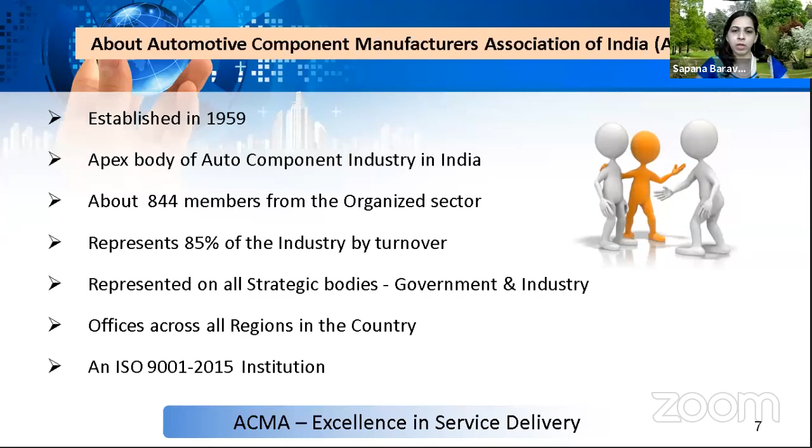So we serve the industry in 5 pillars. We represent the skilling and training pillar. These are the different services we provide for the auto industry and others.

First is we provide the operation excellence program, which we call the cluster program, where we increase your profit and reduce your cost. There are standard roadmaps available, but we have also developed special programs for COVID related things. The first program is break-even point.

Second program is working capital management. Third program is express new product development. Fourth program is productivity improvement through improved factory layouts. And the last program is managing activities within available resources. These are small programs of 5-6 weeks. You can contact us, we'd like to share the details with you.

We also have the ACMA Unido DHI partnership programs for SMEs, so SMEs can take advantage of these programs. We also organize case study competitions. This year, the competition will be planned virtually with different streams.

We also have our own publications. Impact is our quarterly magazine, and we have a book written by our guru, Ms. Nasihan. These are small manufacturing mantras which are helpful on the shop floors.

We also organize the ACMA awards, which are the most recognized in the auto component industry and have a long history of over 50 years. There are 5 categories through which you can apply. There is an ACMA awards online management system, which will be activated from June onwards. So these are the 5 categories you can apply for.

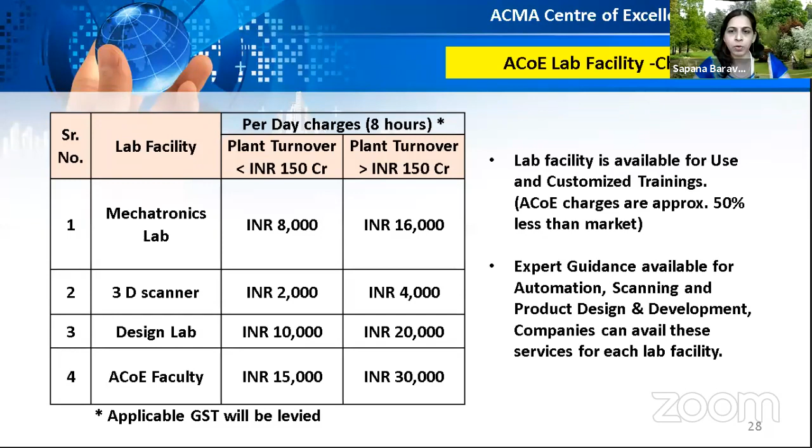We organize national, international, and virtual training programs. Almost 42 successful programs we have conducted till today. These are the technical programs which we organize training for, and also we organize training for soft skills, academia, and general awareness. You can also suggest the topic for training, and we can organize customized programs for you all.

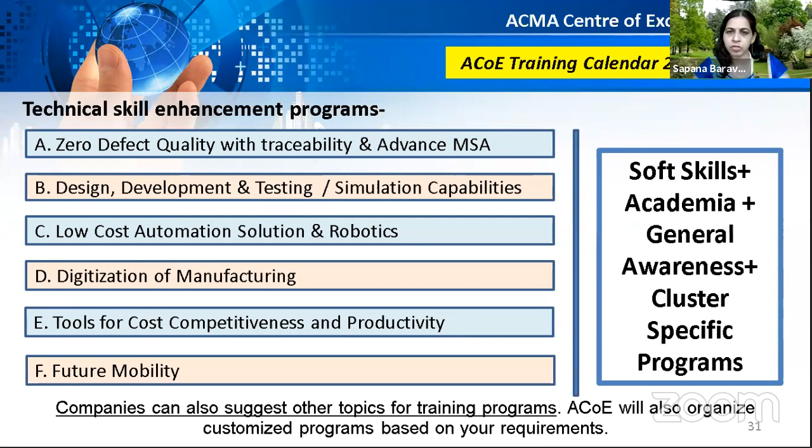These are the upcoming training programs. On 22nd Friday, there is a training program coming on methods for inventory-less production with new methods of shop floor layout. Mr. Dinesh Pathak himself is going to conduct this program.

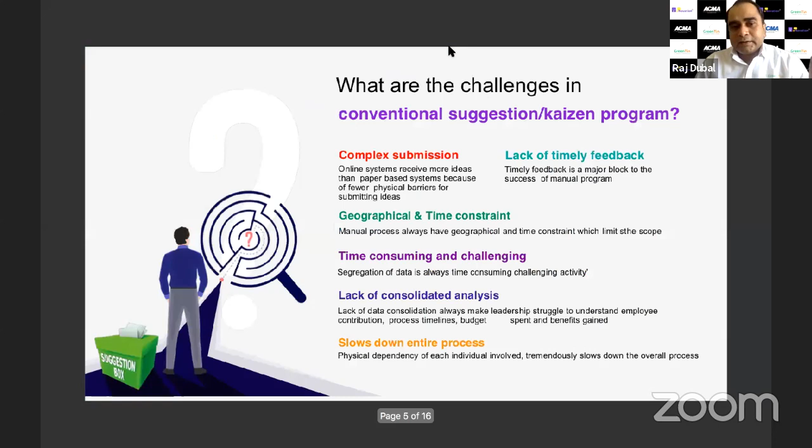What you can have is basically on the cloud. So this My Innovation suggestion scheme, when implemented for your organization, gives you immediate ROI. It's based on cloud technology - you don't have to install anything. It's highly secure like the rest of our services, and it's integrable with SAP or any ERP you have.

Whatever data comes into our cloud system, it feeds into data analytics, and you can access it from anywhere. So these are some of the features of it.

Any suggestion scheme, what the organization needs, is that it should be easily accessible so that all the employees can submit their suggestions from anywhere, wherever they are, through mobile, laptop, or any means.

Once the suggestions or ideas come in, there should be a formal process for processing them, and then feedback goes to the employee. This processing needs a formal way, and once evaluation is done and you implement an idea, then there's a reward and recognition part.

So this entire part we have automated - for example, a knowledge bank. After a couple of years, you'll get a good knowledge bank of all the ideas and suggestions coming into the system. There's also cognitive AI to find duplicate suggestions or ideas, because a lot of people from various geographical regions push suggestions and ideas, so you'll get to know what the duplicate suggestions are.

Just I will start with a brief overview of HPCL. HPC is a Maharatna company. It started in India, with the journey starting with a multinational company, Standard Vacuum, with a refinery in Mumbai, and another multinational, Caltex Oil, in Vizag. Then in '74, Standard Vacuum was nationalized by the government, and in '78, Caltex was also merged, and HPCL was formed.

Last year, in 2019, our company was made a Maharatna company.

In HPC, we deal in different business lines. We have 2 refineries. We deal in petrol, diesel, and many fuels. We deal in lubricants. We are in LPG, aviation fuel, marine fuels - to name the segments, we are there. We are in city gas distribution also. Some new areas we got in the last tender.

Currently, we are having 2 refineries, one in Vizag, one in Mumbai. Another Bathinda refinery we have as a joint venture with the Mittal Group. 55% of our product we are self-sufficient, but the rest, because India is over capacity in refining, we don't require much refining capacity at present, so we take it from other refineries. But for lube, we are the largest refinery in India - 0.45 million metric ton. We are the largest in India, and in that space we are the market leader.

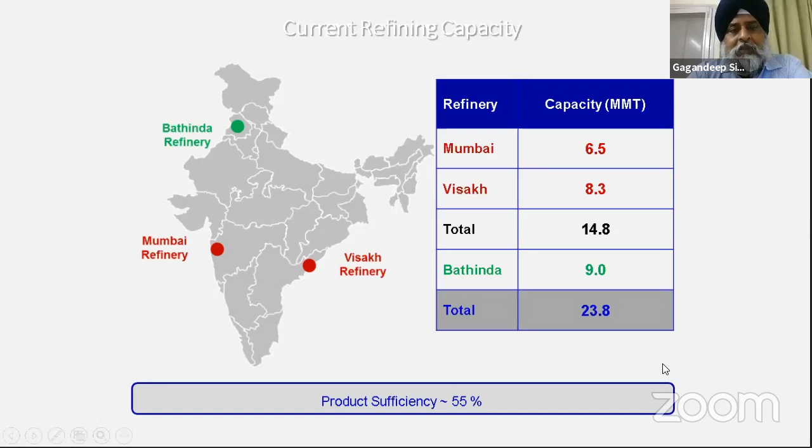As I told, we are the largest lube marketeers in the country. You name the segment, we are the largest supplier to Army. We are one of the largest suppliers to railways, to coal mines, to state transport, to many OEMs, and last but not the least, to many of the esteemed ACMA members also. We are supplying - we have individual supplies also and rate contract supplies.

Among these, the lubricant sector is not a protected sector for anybody. There are 40 players in India. Last year, one independent report has come out showing we are having 17% market share in this space.

Our biggest strengths are our infrastructure. We have 6 different plants at different geographies. Bombay plant is the biggest. Then we have a very modern plant in Silvassa in the UT of Dadra and Nagar Haveli. Then another plant in Chennai, then 2 plants in Calcutta. So we have a good geographical spread for the blending plants also, where we send our base oil, and we can import the base oil also, and blend the product there.

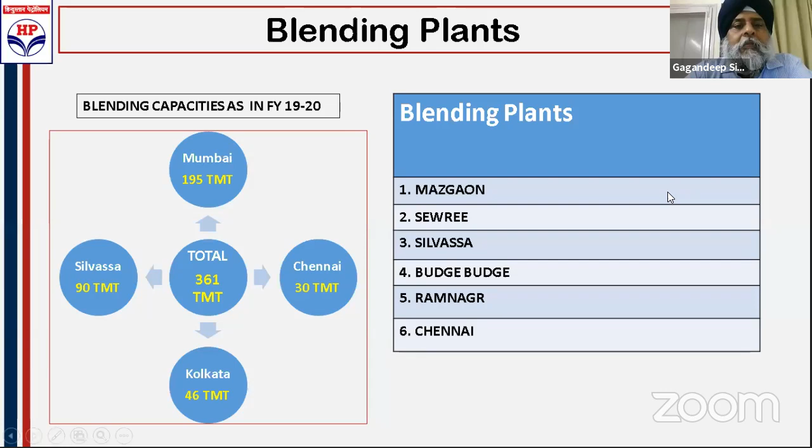I am just giving an overview of our Silvassa plant. It's actually a very modern and fully automated plant with the least human touch on the product. It's a place worth seeing - I will invite ACMA members also to visit the plant whenever they want.

Coming to distribution, we have 11 state warehouses, 20 of our big depots and 4 depots inside customers' premises. Across the whole length and breadth of the country we are spread, and after this lockdown there was a lot of logistics issues for most companies, but because of our spread everywhere and a lot of inventory lying with us, we could service customers to satisfaction.

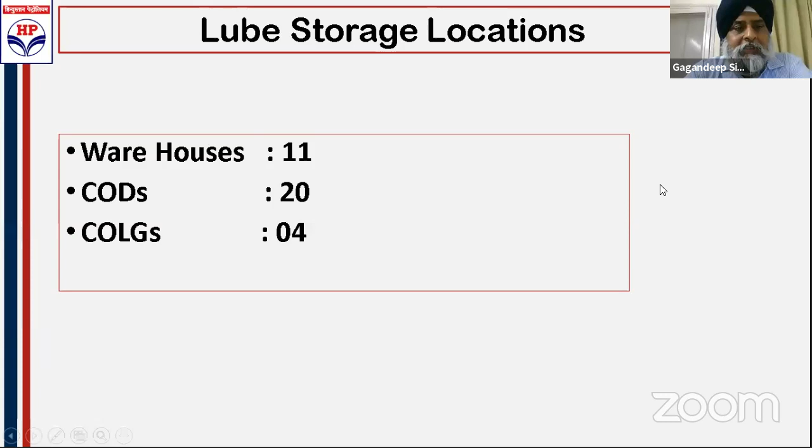Another channel - now the government has given focus to the MSME segment. We already have a very good channel for that, and this is a unique channel in the industry, only in HPCL. Other industry members have different kinds of channels, whereas in our CFA channel, it's not just a selling channel, it is a storage channel also - HPCL storage handled by our channel partner. So we and our customers have very good advantages with this.

We can reach many customers. Say our mega warehouse is in Dharwad, but our customers are at Manesar, Gurgaon, Faridabad, Pune - so we have our CFAs there. Total 113 CFAs at present we have, from Kashmir to South, everywhere.

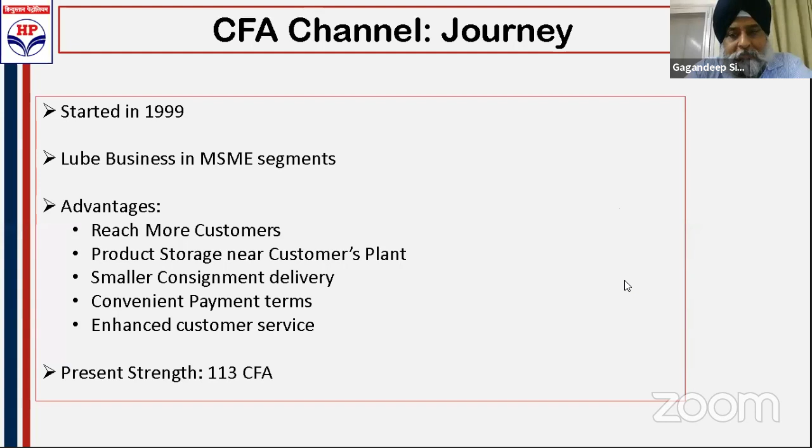Another channel is our lube distributors. In the bazaar segment, where mostly automotive products are sold, we have a very strong network of lube distributors. For the knowledge of the audience, I want to share for the two-wheeler segment - because of this strength, our lube distributor strength, we are the #1 player for the bike segment after-sale lubricant market.

Talking about strengths, our R&D infrastructure is the best in the industry. It is headed by Chief General Manager, Mr. Jain, who is also in the panel. Our R&D infrastructure as well as manpower are the best, and they are tuned to industry needs. We are developing many products based on the requirement of the industry, and we have been quite successful because of this.

Next slide, please. Again, last but not least, there is a quality control setup. Every lube blending plant has a quality control lab independent of the plant. Other than that, we have 46 labs, all accredited, and we can give all kinds of quality services from our system.

Before I get into the presentation, I will just share, in addition to what Gagandeep said, we have 15 Lube regional offices across the country, headed by a regional manager. There is also a sales engineer or technical officer in each regional office, available at the beck and call of the customer to handle quality complaints, to handle any issues, to guide him on any new lubricants, switchover, any new applications, which grade is to be used, wherever the customer is looking for somebody to guide him, especially on lubricants. So this person is very much available.

He's contactable, his numbers, mobiles, all are available. You can go to our website, www.hplubricants.in, and see the product data sheets, get the data, and we are very much within the reach of the customer. So that's one.

Now, as was being talked about, this COVID pandemic has really created a total breakdown for industries, and the atmosphere was that the workshops have closed. So we thought it would be good to share a few very quick tips. Of course, people will have their own maintenance teams who must have already taken care, wherever the industries have opened and wherever they are in the process of opening post lockdown. So these are quick tips I'll just go through. Madam, next slide, please.

In most cases, a simple filtration will work. A simple on-site filtration should work. Next slide, madam. In most cases, a simple on-site filtration will work.

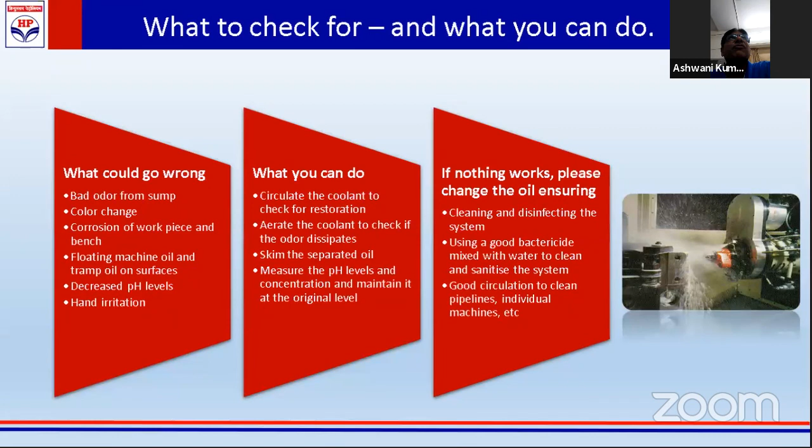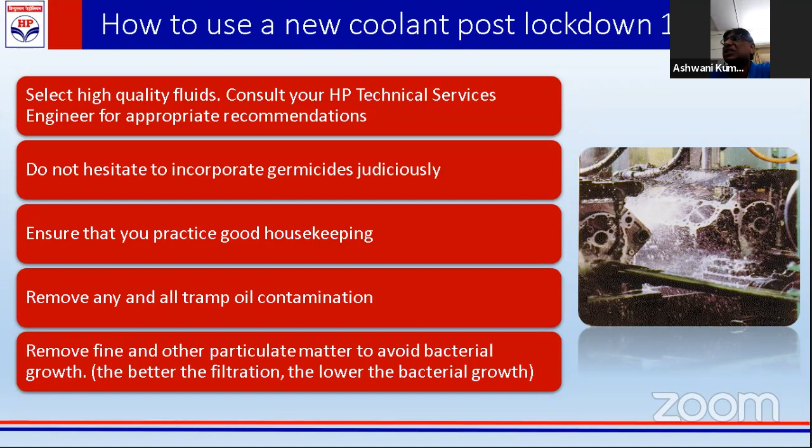Then for soluble cutting fluids, we have the Koolkut series, a number of grades under the Koolkut series, which are soluble cutting oils. I'll be detailing further on that. These may get spoiled, especially if you are not left with regular aeration in the system. If air bubbling is not there in the system, bacterial formation takes place. So the bactericides will spoil, the pH will drop, it will become acidic. The sumps will become acidic and you may have to change the sumps. So you may have to disinfect the whole system and then sterilize before refilling or restarting the machines.

Next slide, madam. Now, what exactly could go wrong? You could have bad odors coming when you approach it. The maintenance team, the operators, when they approach these sumps, they'll find the bad odor is coming, the smell is bad. You may be facing skin irritations when you put your hands in the sump oil, so you need to wear gloves. You may find tramp oil floating, and all that needs to be cleaned. Some rusting might have taken place in the tools, so all that has to be properly taken care of. Circulate the coolant, see that circulation and aeration are established, and measure the pH levels using pH papers that are available.

See that you have pH in the range of 8, 8.5, 9 - so it is in the basic range and no longer acidic. This has to be properly taken care of, so cleaning, disinfecting, and best maintenance practices are called for. Operator safety is also utmost important.

I'll touch more on metalworking fluids and cutting fluids. We have both soluble cutting fluids as well as neat cutting fluids in our basket - a wide range for different kinds of applications, widely used by customers across a pan-India basis, not only for OEMs but even for large auto ancillaries, which may include a large number of ACMA members. And then we have heat transfer fluids.

I'm not touching on this - probably this may not be relevant for auto ancillaries. Then quenching oils, rust preventives, drawing oils, rolling oils, rubber process oils, coning oils. Then transformer oils as well, and even conveyor chain lubricants, and special automotive specialties like shock absorber oils or brake fluids - all of this is an entire range. More than 400 different types of grades are there.

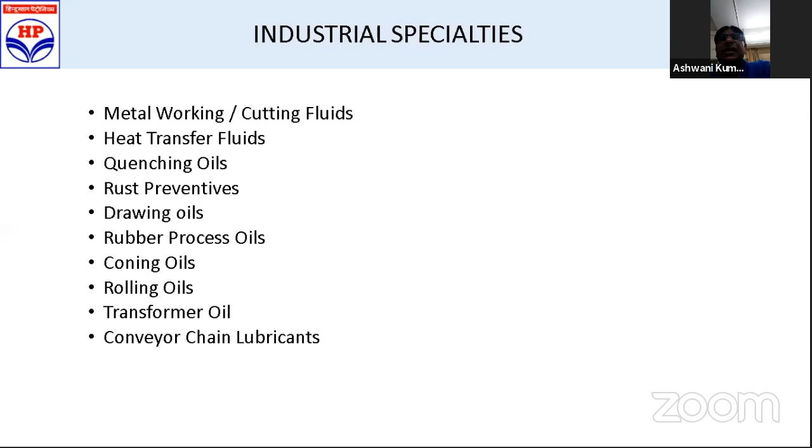So based on the need, we can offer you customized grades. We can study your applications and offer our equivalents to the competitors. Important to add here that we are a public sector, Government of India company. So though we are listed on the stock exchanges and need to be profitable - we are committed and answerable to the shareholders - at the same time our profit margins are wafer thin. So we give value for money to our customers. We are very conscious of our costing, pricing, as well as aftermarket service.

Availability on time - as Gagandeep was saying, there is a wide network across on a pan-India basis, so availability is assured, and we keep drums in advance if you assure us that a certain quantity of drums is going to be used in the next 30 to 45 days.

Coming to base oil categories - people may be aware there are group 1 to group 5, various kinds of base oil categories, with progressive improvements from group 1 onward. These are differentiated basically on the sulfur percentage, the saturates available, and the viscosity index. Viscosity, as you know, is resistance to flow, and viscosity index defines the change in viscosity with respect to every degree rise or fall in temperature.

So the higher the viscosity index, the more the resistance and the more the capacity to withstand changes in temperature. So it will oxidize slowly, and it will maintain more optimum viscosity if the VI is higher.

As we progressively move from group 1 to group 5, we find that group 1 viscosity index is generally about 90, 95, 97 - it's supposed to be between or less than 120. Group 2 is also less than 120, but probably closer to 105, 110, 115 in that range. And group 3 is greater than 120.

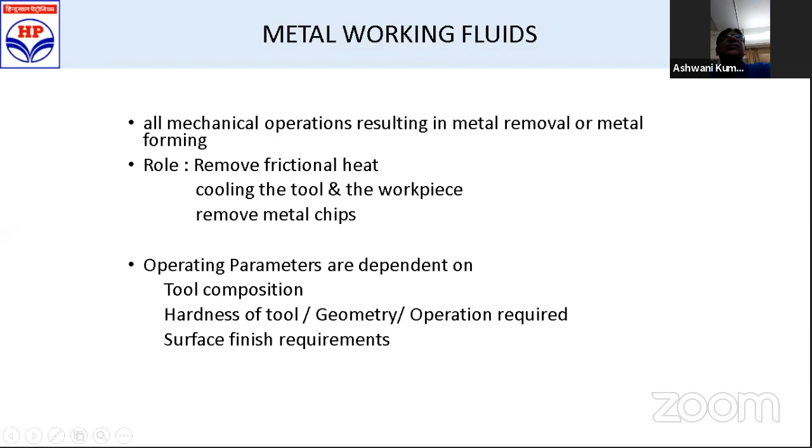So we are talking mainly of oil types of cutting fluids. This can be straight mineral oils or these can be emulsions, blended mineral oils.

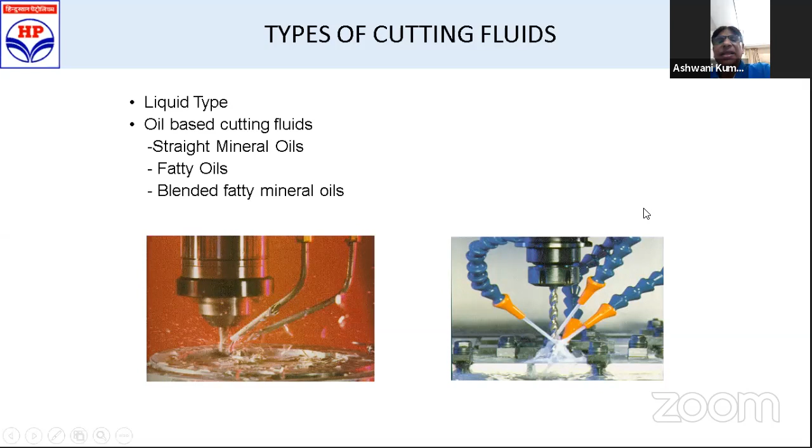In the metal working fluids, you'll find a lot of competition, large number of producers. But if you see the performance, then you'll come to know that our soluble cutting oils don't compromise on the additives. We blend our cutting oils using high performance additives, best of the best in the class, with approximately 20% volume in all the industrial oils, metal working fluids.

Unlike engine oils, where the viscometrics and performance levels are well defined with API and SAE - American Petroleum Institute and Society of Automotive Engineers - here these are customized grades with application in mind, and there are no comprehensive performance tests for comparison. There is no apple-to-apple comparison as such. You can monitor the performance of individualized grades, and the performance will speak for the grade.

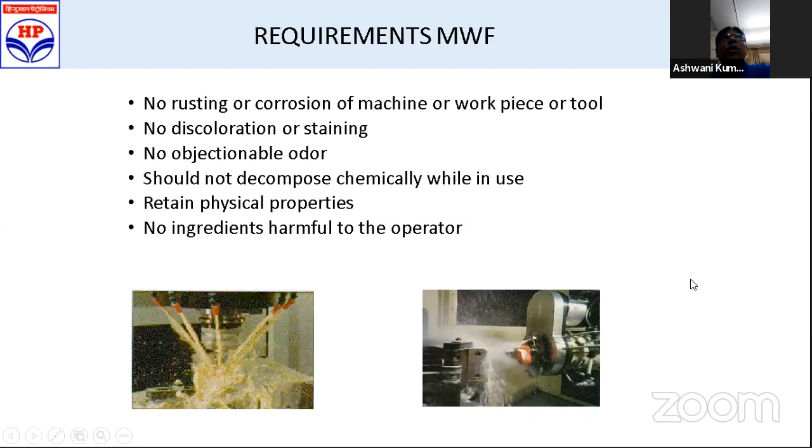Some important precautions for soluble cutting fluids: always the product is added to water, not vice versa, otherwise it will form a paste. Water is about 95%, so generally the product to be added is about 5%. The quality of the emulsion, the stability of the emulsion, depends on the quality of the water - soft water to be used, preferably less than 100-150 ppm max, because if you get into the hard water range, the emulsion won't be stable, you won't get optimum machining, consumption will vary, and the pH will drop. So all those things have to be kept in mind.

Periodically check the strength of the emulsion. There is a refractometer available - maybe people are doing it already. You can take a refractometer and adjust the concentrations, and pH paper is there so that you can optimally keep adding top-ups, which can be decided and adjusted so that the pH is properly maintained.

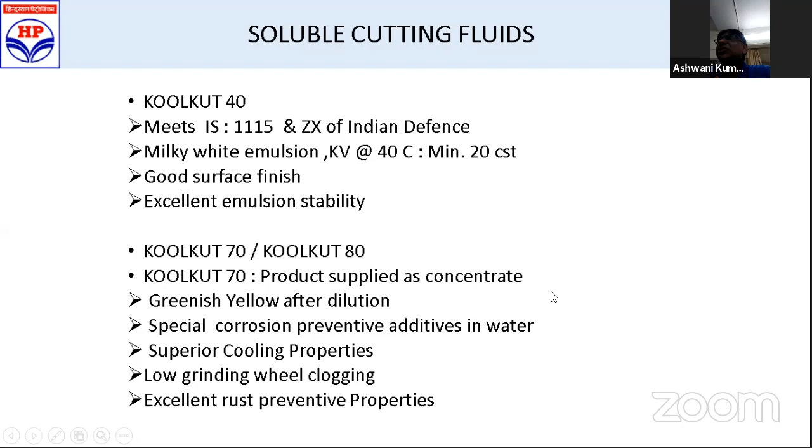We have grades like Koolkut EP66, EP67 with EP additives - extreme pressure additives - for where more severe machining is needed and the depth of cut has to be higher. These are general purpose cutting oils, again 5% emulsions, but for heavy duty applications, and Maruti has been using it in the past. Koolkut EP67 is specially recommended for stainless steel rolling where really severe machining is required. We have in fact replaced Dubois of Netherlands at Jindal long back, and this grade was promoted and accepted by Jindal.

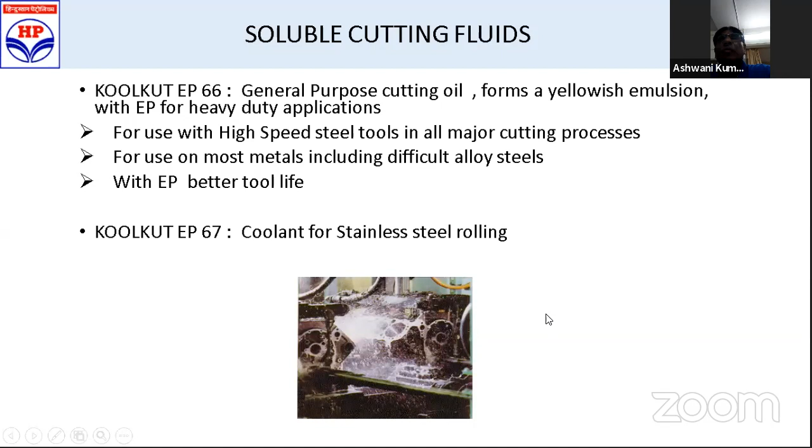Then we have synthetic fluids as well. They are highly resistant to bacterial attack, and lower consumption and longer life are the hallmarks. So then you get into synthetics, but they are costly.

Next slide, madam. Now the challenge is sustainability. What do you see? How is the future? Future is talking of sustainability, that today we are talking of grades which are biodegradable, environmental friendly, phenol free. We used to have cutting oils which had phenol, so today we are having phenol free kind of soluble cutting oils. So sustainable.

Now people define sustainable as when you put a live fish in a cutting oil soluble cutting oil sump, it should not die. So that is a challenge. We should make them that sort of friendly soluble cutting oils so they are not harmful to human life, not harmful to animal life, no skin irritations, no kind of any harmful effects on the human body.

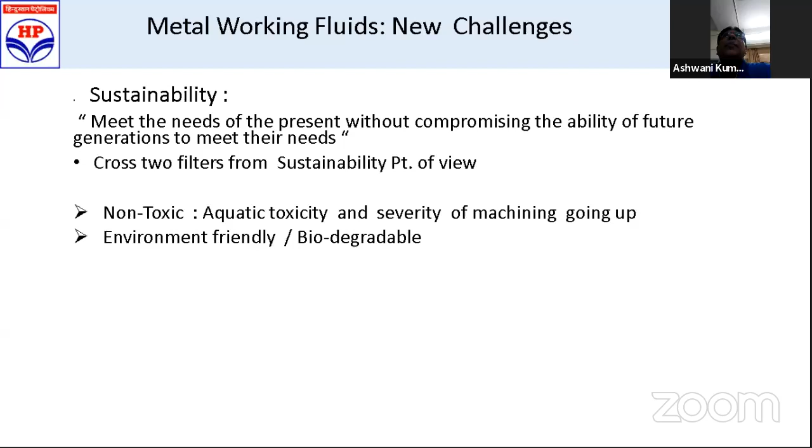Next slide, madam. Then coming to neat cutting oils, we have a wide range of grades, specially customized grades. We have Trimofin 14, 15, those kind of very low viscosity grades, especially for honing and lapping applications, finishing operations. Then we have a little higher viscosity grades for honing and all, where we talk of Trimofin 16 and 18. Trimofin 19 is chlorine free, very competitive, a low viscosity product with EP properties.

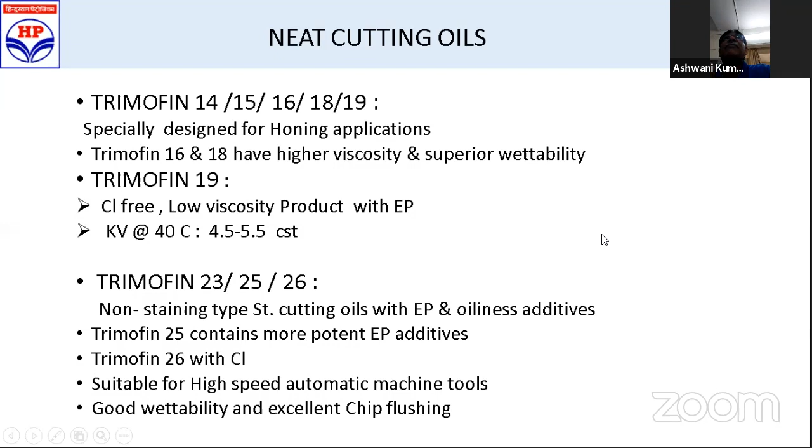Then we have Trimofin 23, 25, 26, which are non-staining, sulfur free. We have active sulfur, inactive sulfur coming into play, so that comes from the base oil and then from the additive as well. So these are non-staining types, straight cutting oils with EP and oiliness additives, and they are very suitable and high performance delivered in high speed automatic machine tools.

Next slide, madam. Excellent chip flushing ability as well. Then Trimofin 27, it's for pull honing. Widely, Maruti Suzuki continues, Maruti Suzuki at Gurgaon is a regular customer for this.

Then we have other grades, Trimofin 54 for deep hole drilling. For deep hole boring, the low viscosity gives excellent cooling and quick swarf and chip removal. Next slide, madam.

Coming to Trimofin 55, 56, these are the staining types. These are for higher machining, for broaching, gear hobbing, gear shaving, these kind of grades with EP, active sulfur, chlorine as well. So these are great customized grades.

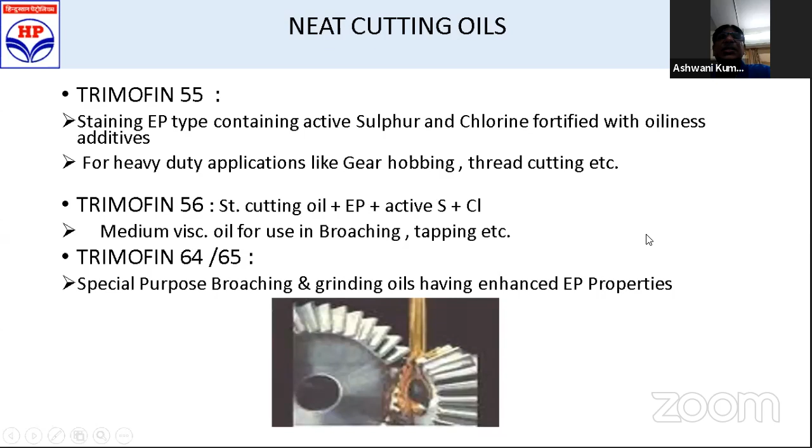Coming to quenching, now what is quenching actually? Quenching is controlled cooling of steel components in a fluid to give specified properties. Now what exactly do we want from quenching? What is the desirable output? It's basically uniform hardening with minimum distortion, minimum cracking, and a smooth surface finish. And again from the oil side, you need the highest sump life, longest sump life, minimum top-ups, longest drain intervals. So that is what is desirable.

Now for that, I'll give three to four immediate quick points which need to be kept in mind. First is the best housekeeping, regular filtration of the quench tank. The quench tanks must be periodically cleaned and the quench oil must be filtered to remove scales, contaminants, and metal shavings present over a period of quenching. Then agitation is extremely important so that the temperature in a vertical tank of the quenching oil from top to bottom is uniform.

It doesn't leave any thermal gradients. The oil is uniform, the quenching is uniform, the hardness received across the metal piece, the job piece, is uniform. So generally we recommend a 50 micron double bag filter for proper maintenance. The oil must be continuously agitated so there is uniform surface microstructure. It's very important, the microstructure, so grain structures are not different. So you don't find any different hardness across the piece, across the job. So this is very important.

So periodically, product sweetening is also essential, apart from agitation and filtration. Then we must also look for that hardening, so basically when you're looking for, madam, next slide.

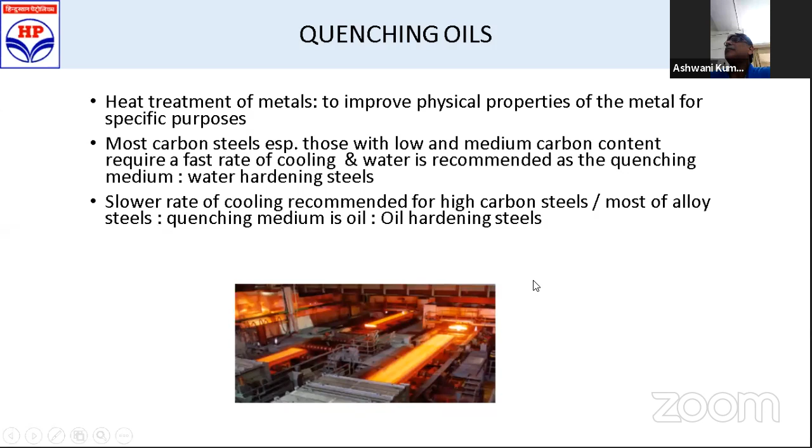Now, flash point - generally people consider this a very important criteria. The most important parameter, as you all know, is viscosity. Especially in case of quenching oils, flash point is also very important to ensure there is no fire hazard. Flash point is basically the temperature at which the vapor is first ignited - the moment you bring it near a flame or spark, the first flame takes place, which is of course not sustainable. The moment it becomes sustainable, we reach the fire point.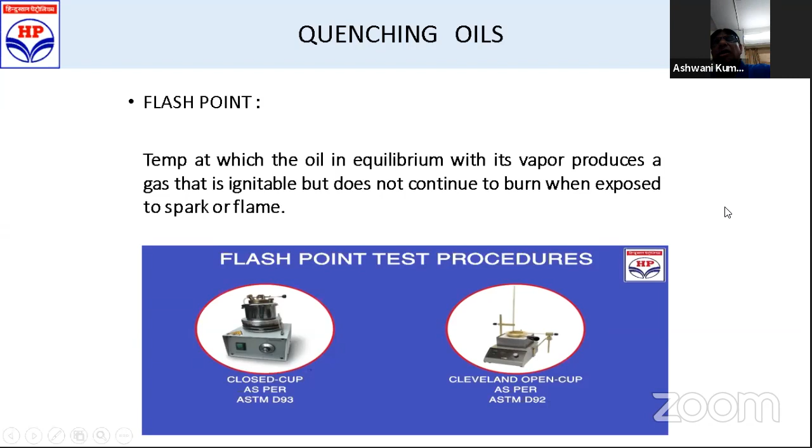Next slide, madam. So now, how do we control the hardness? First is the composition of the steel - what sort of steel are we handling, its properties. Then the dimensions of the component, the structure of the component, the time we are giving, and what sort of quenching we want - a slow cooling or faster rate of cooling. So all of this will vary.

It is important that heat transfer rates will vary with the changes in viscosity. Viscosities decrease as you heat, and heat transfer rates increase as the viscosities reduce - they become lighter and the flow rates are better. Next slide, madam.

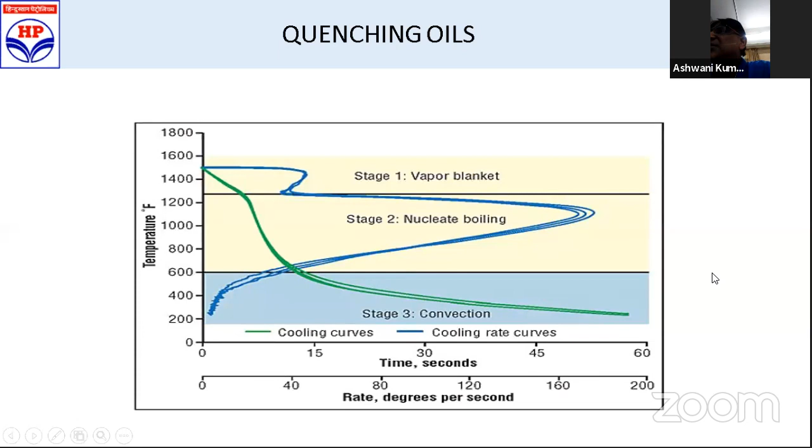Next slide, madam. So the next slide, madam.

Traditionally, heavy forgings have been quenched in large volume open tanks using mineral oil based quenching oils.

Now the advantages are slow cooling speeds, less risk of cracking because cracking will not give you uniform hardness, easy availability, and low maintenance and care.

Because of maintenance and care, especially in MSME segments where people don't keep professionally qualified engineers, they say they cannot afford it, so they manage with unqualified people, and maintenance is hit. That should not be the case. Please take very good care and maintain the systems properly because they can really be fire hazards. You can lose much more than you save by cutting costs on hiring a professional engineer.

But the disadvantages are huge flame heights could be there, requiring increased height of sheds, and flames can really go high. So the work environment becomes hazardous, with fumes all around, oily floors, unhealthy and unhygienic conditions.

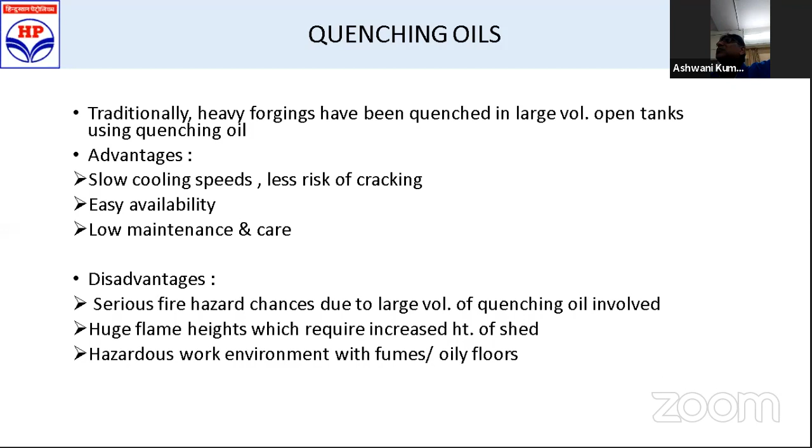Metaquench grades are formulated and fortified with additives. We have both straight cutting oils as well as the range of compounded, additized oils. All sorts of grades are there: marquenching grades and slow quenching grades.

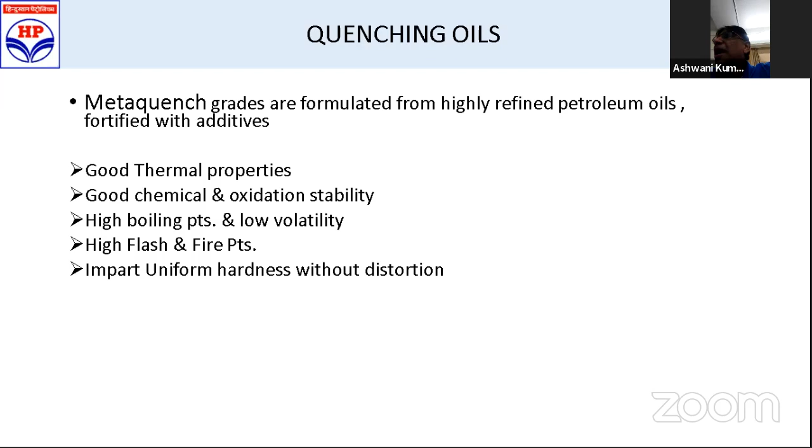They have good thermal properties, good chemical and oxidation stability. These are the USP of our quenching oils, which we call the Metaquench series. They have high boiling points and low volatility, high flash and fire points, and impart uniform hardness with minimum or no distortion.

Metaquench 39, 40, these are straight mineral types with no additives, but they give low volatility.

We have Metaquench 42, 43, which are suitable for high quenching speeds. And then Metaquench 44 - I probably won't be able to detail all the grades since time is short.

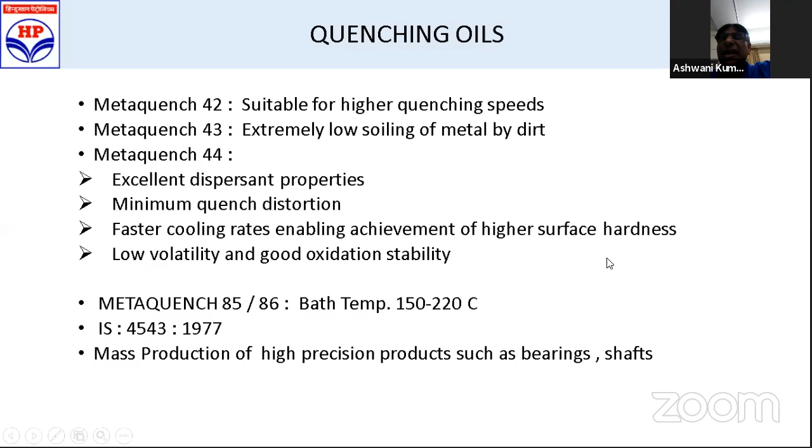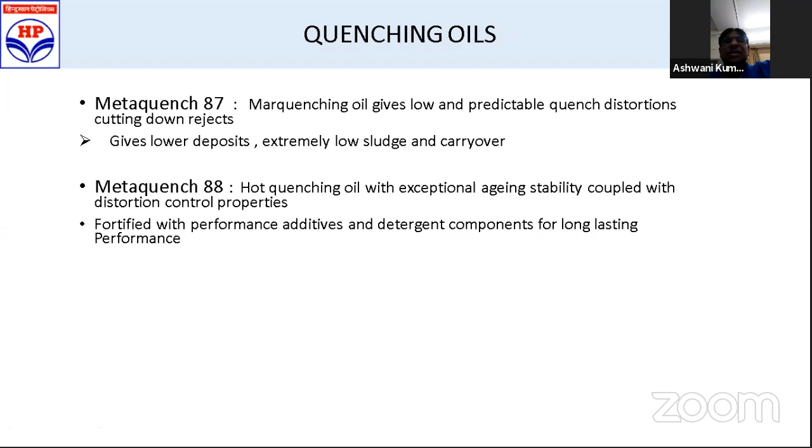These are marquenching oils, 87, 88, for when bath temperatures are around 150 to 220 degrees centigrade, and for the cooling rates that are desirable. They are fortified with high level performance additives for long lasting performance, and have been proven in the industry.

Coming to rust preventives, I'll take just a few quick minutes. Petroleum based rust preventives have wide application for temporary corrosion, short-term corrosion, long-term corrosion, storage and transportation.

Many times you're exporting your pieces across seas, so what sort of environment is there - is it a saline atmosphere? What sort of protection are you looking for? Is it indoor storage or outdoor storage? Is it properly packed or not properly packed?

There's a salt spray protection test done in the labs, which defines what sort of salt spray protection the rust preventive can give. And water separation, that is demulsibility - how fast it can throw out water. If you're packing it nicely, the requirement on the rust preventive goes down, since it cuts off contact with air and the external environment, providing a very thin film.

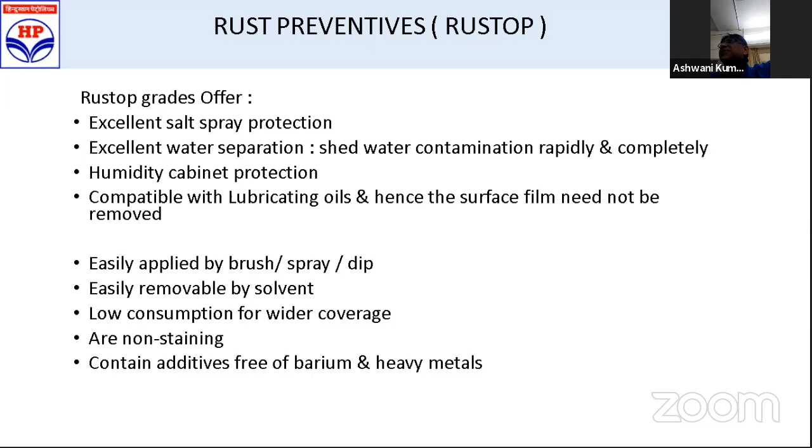They're easily applied by brush, spray, or dip, and are easily removable with solvent. They're compatible with the oils used wherever the job piece will be applied - maybe in a gear assembly or anywhere else. They won't leave any residue, or the residue will have no negative effect. They're non-staining types, with no additives which are heavy metals like barium or anything similar.

We have solvent cutback type preventives, oil-based, and grease-based types, for a wide range of applications depending on how corrosive the environment is, where we're looking for rust protection - whether it's exposed to sunlight, high temperatures, and what sort of surface it is, already polished or bare. Accordingly, rust preventives will be selected, customized, and applied.

So we have Rustop 173, 173DW - that is the dewater grade - and many other grades.

Recently, we had a very successful new grade, Rustop 181, proven, with a case study available at Tata Steel Tubes, Jamshedpur, where we replaced many other competitors. The performance of the rust preventive was extremely appreciated by the customer, and this has proved its performance.

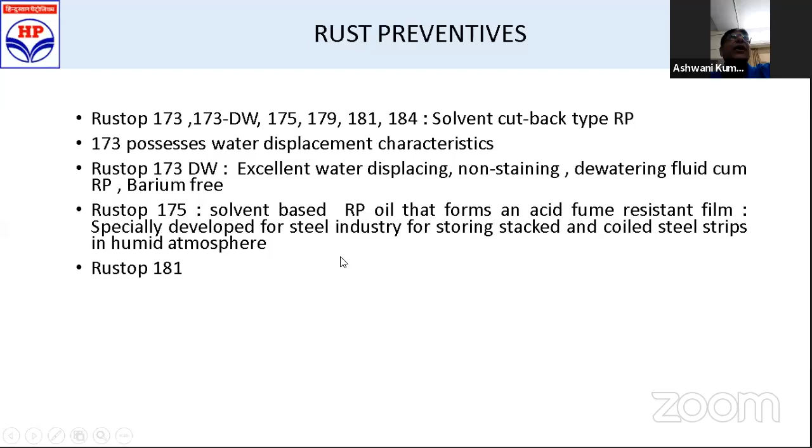Coming to our various other grades which are oil-based, for different applications - drying type, non-drying type - with moderate water displacement characteristics.

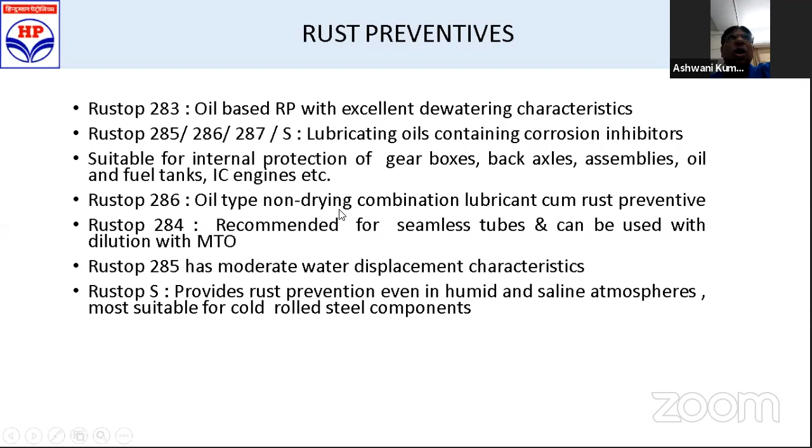So coverage, as I was saying, depends on quick drying type, slow drying type, or non-drying type. Coverage generally follows the thumb rule of 1000 divided by film thickness in microns. It could be a few microns - 3, 4 microns - or could be 15 microns as well. Depending on that, the cost of the rust preventive will go up accordingly based on the film thickness it forms.

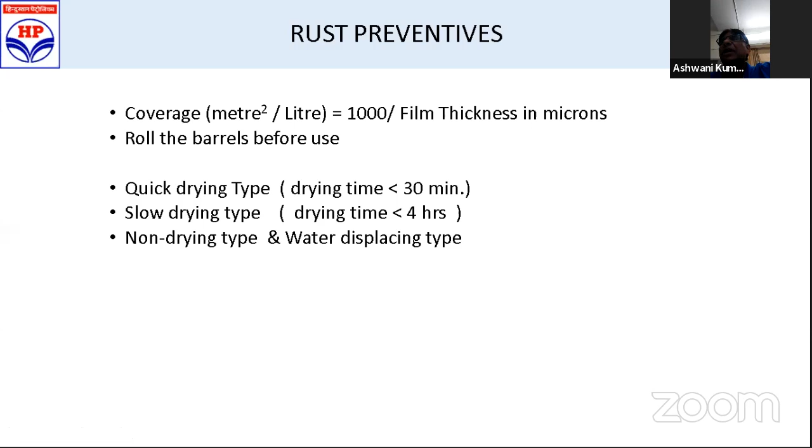I was talking about the humidity cabinet test and the salt spray test. These are chambers where metal pieces are kept and studied to see how long before rust appears - the metal piece doesn't rust for a certain duration.

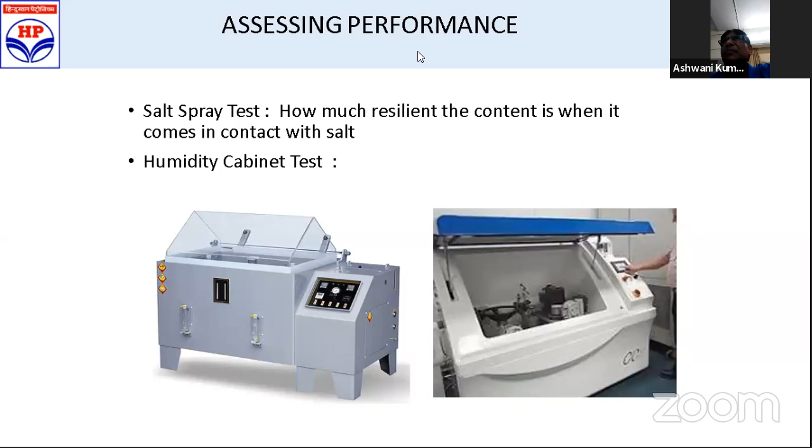Coming to metal drawing compounds, we have metal forming processes - pressing, stamping, deep drawing, wire drawing, tube drawing, forging. In these operations, considerable heat and stress are developed, so you need a good drawing oil so there is no chipping of the metal when it comes in contact. This is very high pressure applied, so you need good drawing oils.

I can give the example of Power Grid Corporation for their aluminum wire drawing - we supply Drawmet 15 and Drawmet 15S, the synthetic, ester-based grade. There's a wide range of grades available, varying by application and viscosity range you're looking for. Synthetic grades offer the benefit that the tool and job piece will remain cleaner for a longer time, top-ups will be less, and the hardening of the drawing oil will be at a slower rate.

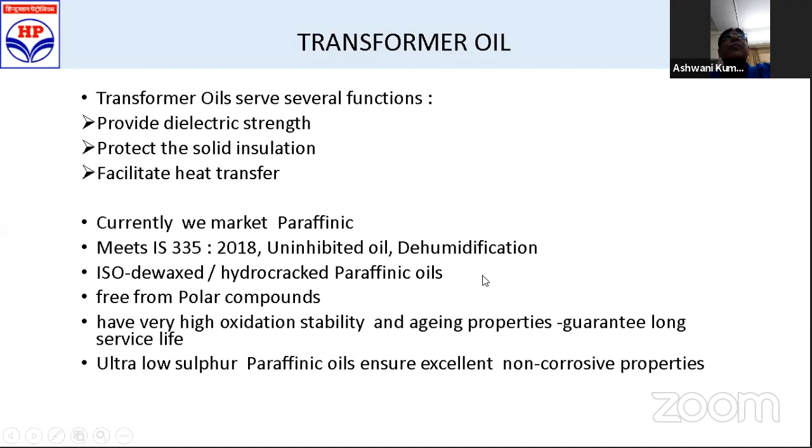Now, polychlorinated biphenyls - these were banned long back, in 1979 the US banned them. So concentrations cannot be, and in fact are nil, in our transformer oils.

Coming to rubber process oils - I think people are very well conversant with these. They can be aromatic, naphthenic, or paraffinic. Traditionally, DAE types - distilled aromatic extracts - have been widely used.

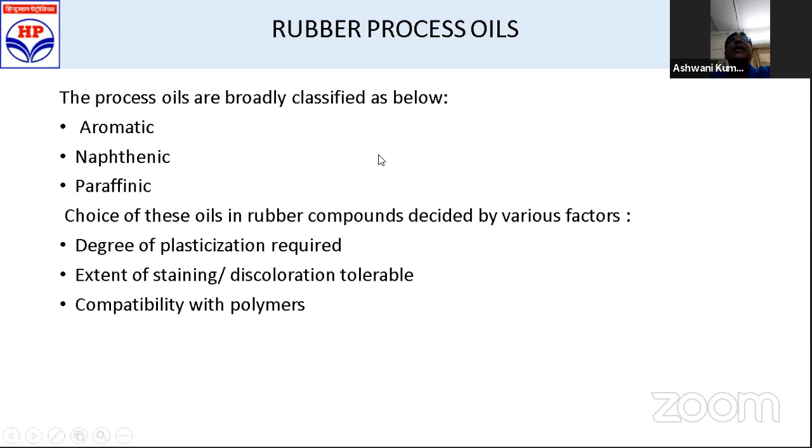But then the European Union, from 1st January 2010, announced that we need low PAH - low polyaromatic hydrocarbons - such that the sum of 8 PAHs already defined by them has to be less than 10 ppm or 10 mg per kg, and also benzopyrene has to be less than 1 ppm or less than 1 mg per kg.

Based on that, we have developed a few low PAH grades which are widely used - MRF and Balkrishna tires are using them. Many such customers have PCA content, which we measure by IP346, less than 3%. As per DMSO extract this can be studied separately, and as per IP346 that module is also there.

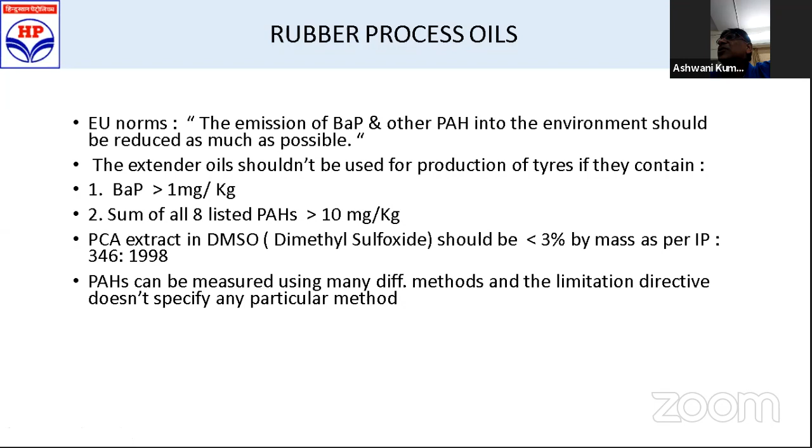Today we have access to a Grimmer lab - we get testing done from the Grimmer lab in Germany. The low PAH profile is tested and shared with customers for our grades. Coming to those grades next.

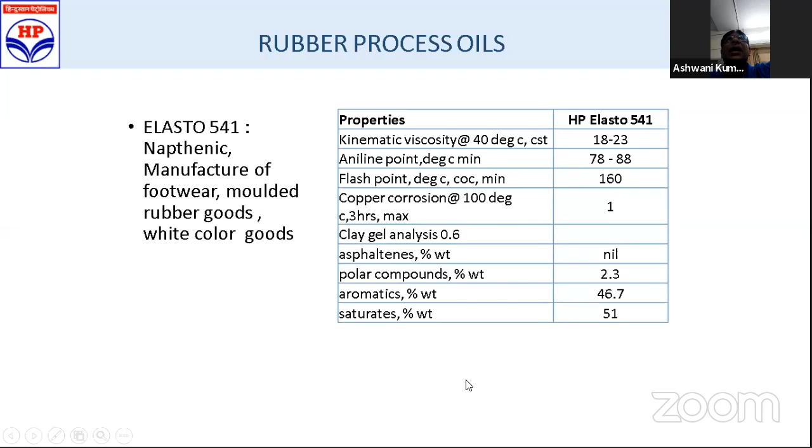710, as I already told you, is suitable, and we are the market leaders in this segment, selling a huge quantity, virtual monopoly with Hindustan Petroleum. Coming to low PCA grades, as per the new regulations, which are widely prevalent,

many rubber tire OEMs have also shifted to low PCA grades. Apollo, as I understand, is fully shifted to low PCA grades. Elasto Supreme TRAE is a grade suitable for high-end performance. Then we have another grade, RAE, which has a little higher viscosity. For customers who have arrangements to heat them, it is more competitively priced in terms of cost, giving little more cost benefit in a scenario where it's an extremely cost sensitive market and segment.

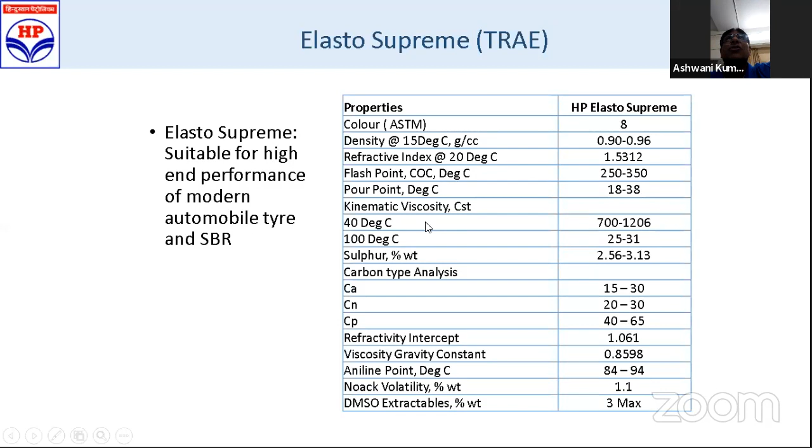I'll quickly touch on this Koolgard P and Thanda Raja.

These are ready to use as well as concentrate coolants. Koolgard and Koolgard P are our concentrate coolants. Koolgard P is boron free, amine free, silicon free. It is environment friendly, fully biodegradable.

Thanda Raja is a ready to use range, which Bajaj is using, it's a pre-mixed coolant so you don't have to add water. It is available in 1:3 or 33% concentration or 50% concentration, so basis your usage, how much concentration you want. These grades are available in different variants.

Then brake fluids DOT 3, DOT 4 as per standard specifications. These are validated by ARAI, Automotive Research Association of India. Many of the STUs procure this from us.

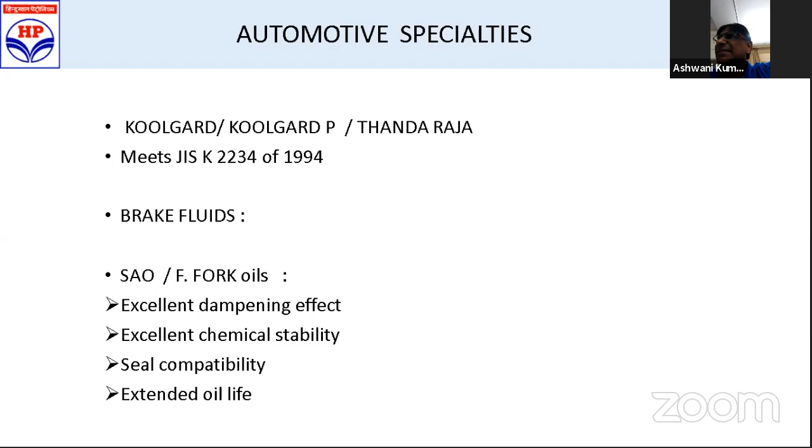So we take pride in that, serving such world-class OEMs. A lot of grades I have not been able to cover because of time constraints, but you can write to us, talk to us, we are available. There's a wide range, and if we still need to develop more grades, maybe in synthetics or specific applications, you're welcome.

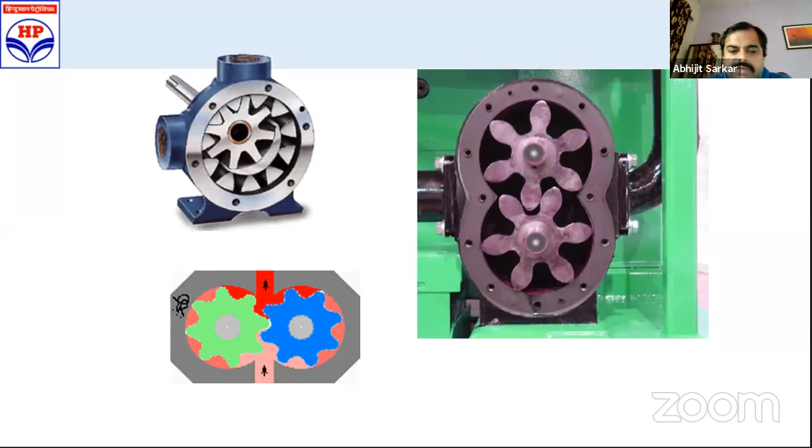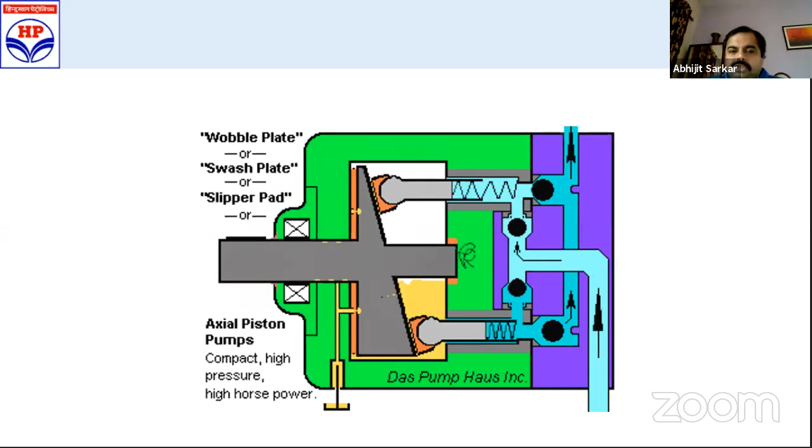This is also an axial piston pump. You have fixed displacement axial piston pumps, and variable displacement pumps nowadays, which are improving energy efficiency.

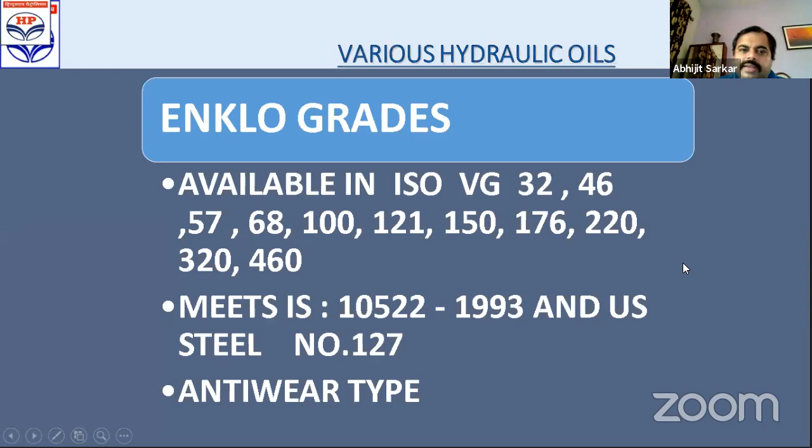Next slide - so then we have the hydraulic oil for high pressure. Just the previous one, madam - I think the previous one.

Then we have the hydraulic oil for high pressure systems, known as the Enklo HLP grades or Enklo HLP-T grades. These are zinc type, anti-wear hydraulic fluids, and Enklo HLP grades meet the norms of the German standard DIN 51524 Part 2.

Then there is, like in the industry, your dilemma of how clean your hydraulic oil is. Most of the time your hydraulic oil gets contaminated either from use, maybe in forging applications or various other applications. So, just like a human being sometimes requires dialysis, similarly the oil also requires filtration if it gets too contaminated.

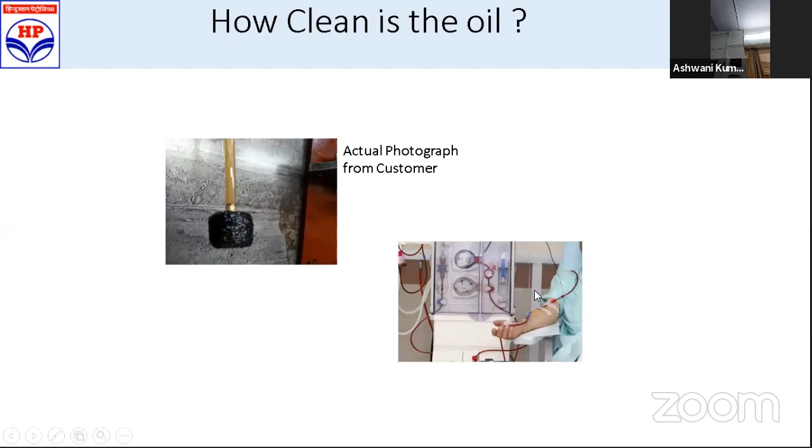We in HPCL have got the filtration system which can supply you super clean oils. The super clean oils are measured as per NAS, that is National Aerospace Standard 1638.

The normal oil you get in steel barrels which is unfiltered is approximately NAS 12 to NAS 11. But by means of filtration, we can reduce the contamination to NAS level 6. You can see there is a drastic reduction in the degree of contamination when you jump from NAS level 12 to NAS level 6, and the particle counts in different sizes coming down.

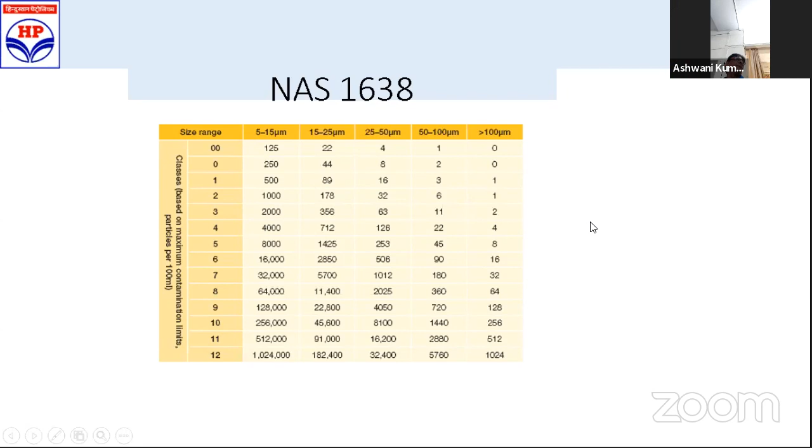All this is available in our Silvassa plant, as my colleague Mr. Gagandeep Sodhi has told you.

This is the printout in our plant which we get. You have got a system which gives you the NAS, how clean the oil is in terms of NAS, and equivalent NAS you have got ISO 4406 also.

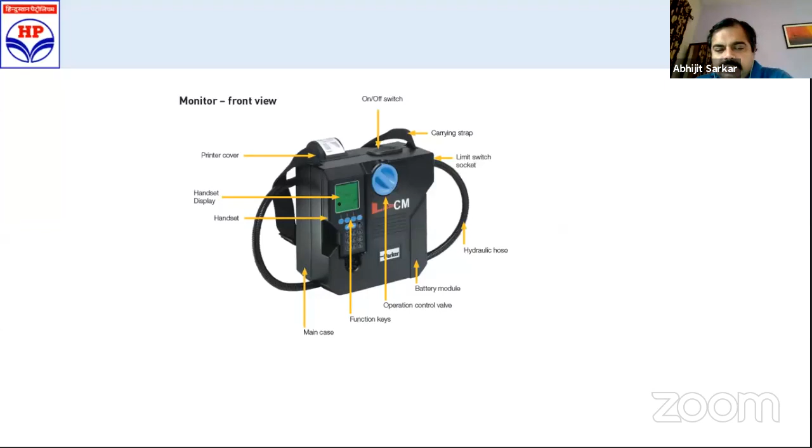There is a machine called the laser particle counter, and this basically counts the particles which can give you the reading.

Then we come to the compressor oils. In all the industries, the most popular type of compressors are reciprocating and screw type. We have got compressor oils for all types of compressors.

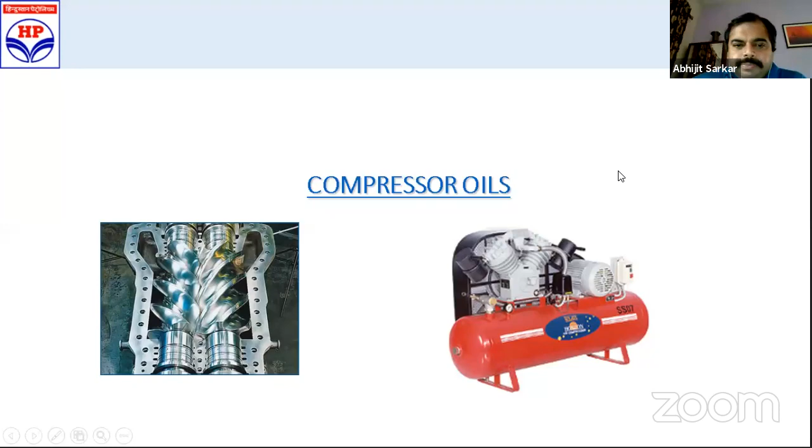Our starting grade is HiCom C grade, which is used for reciprocating types of compressors. The most common grades are HiCom C 150 and HiCom C 220, used for the lubrication of single and multi-stage compressors with wet air.

Then for air compressors with high discharge temperature, we have got HiCom VDL T grades, which meet the German standard DIN 51506 VDL norms. This is where discharge temperatures touch 250 degrees centigrade.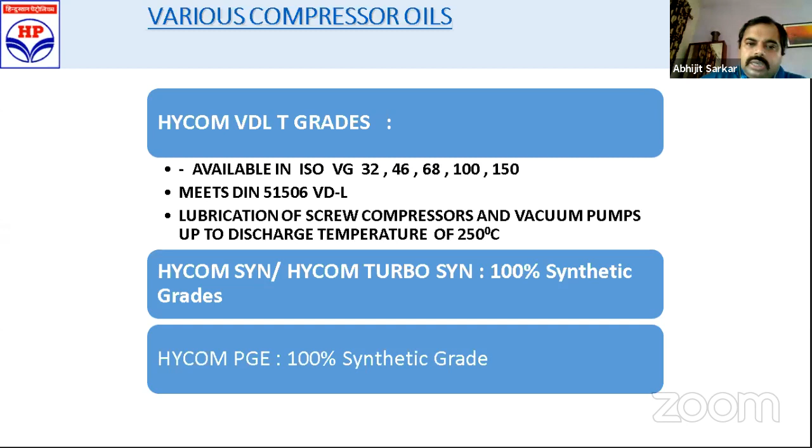Then we also have synthetic compressor oils, especially for compressors of Atlas Copco. We have compressor oils like Hycom Turbo Syn, which are synthetic type and can replace the synthetic oils of OEMs like Atlas Copco. Then we have synthetic oils called Hycom PGE, which can replace the synthetic oils of Ingersoll Rand like Ultracool.

Then we come to the industrial gear oils. We have oils like Parthan EP, which is an industrial gear oil, available in various viscosities: 68, 150, 220, 320, 460, etc. This oil meets the German standard DIN 51517 Part 3, and IS 8406.

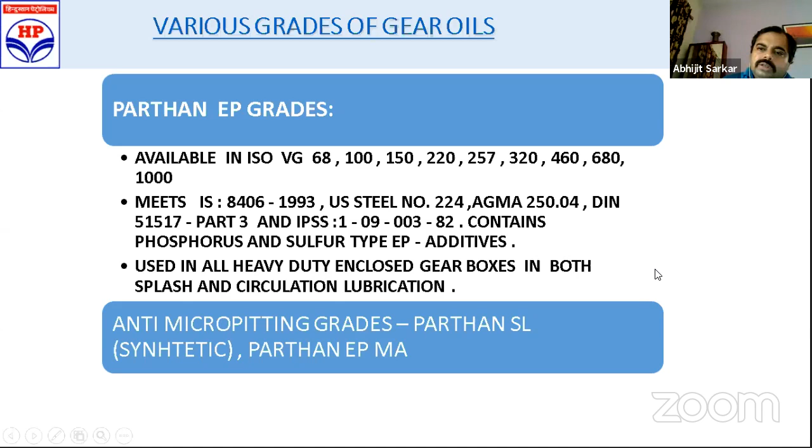It also meets interplant steel standards being followed by the steel industry, of 1-09003, and this is an industrial oil having sulfur phosphorus type of EP additives, mainly for protection of industrial gears. It can be used in all types of industrial gears, and for the new gears coming nowadays, which are case hardened and compact, made by OEMs like Siemens, Siemens Flender, we have special oils called anti-micropitting oils like Parthan EPMA. We also have synthetic industrial gear oils called Parthan SL.

Then finally, for greases, we have got various range of greases. We have got lithium soap greases like Lithon 2, Lithon 3, which are very popular for electric motor bearings. Then we have got extreme pressure lithium greases, Lithon EP1, EP2. We have got greases with molybdenum disulfide like Lithon M2. We have got high temperature lithium complex grease like Lithoplex 1, 2, 3. We also have got lithium complex grease with EP properties like Lithoplex HTX1, Lithoplex HTX2.

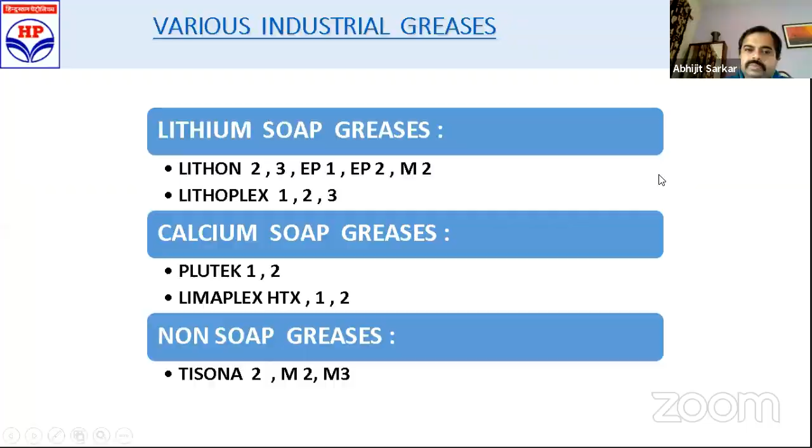Yeah, thank you. So there is, I think so, one hand raised. We will allow him to talk. Yes. You can talk, Mr. Arunmungam. Hello. Hello. Yeah. Mr. Arunmungam, you can unmute yourself and you can talk. By that time, there is one question raised by Mr. Vijay: how are the long life greases for automotive tested?

See, automotive greases, there is a separate IS standard for testing of automotive greases. One is basically the bearing life test. Second is the oxidation stability test for greases. Like most of our greases, like we have got long life greases, their oxidation stability, the drop in oxygen pressure is basically less than 0.5 psi at the end of the test. Then we have got the various bearing tests like FE8, FE9 tests, which can be done to establish the greases.

Yeah, Mr. Arunmungam, you can talk. Hello. I think so, the hand was raised by him wrongly. So we can continue.

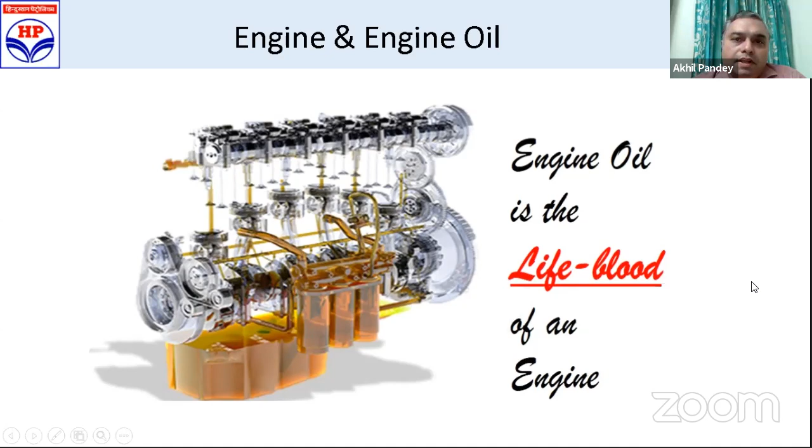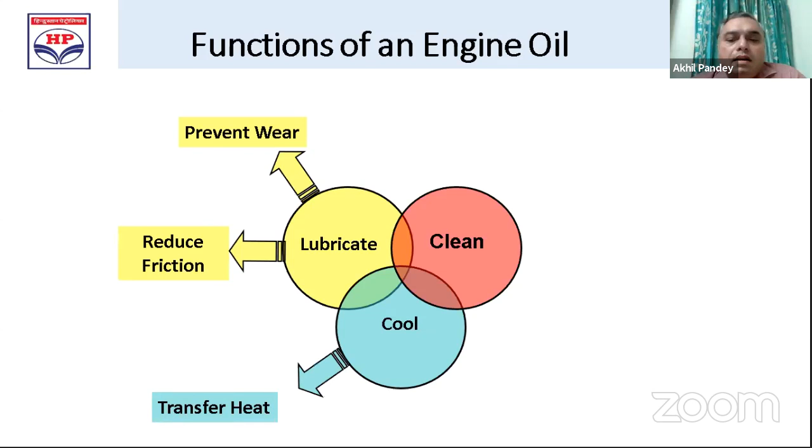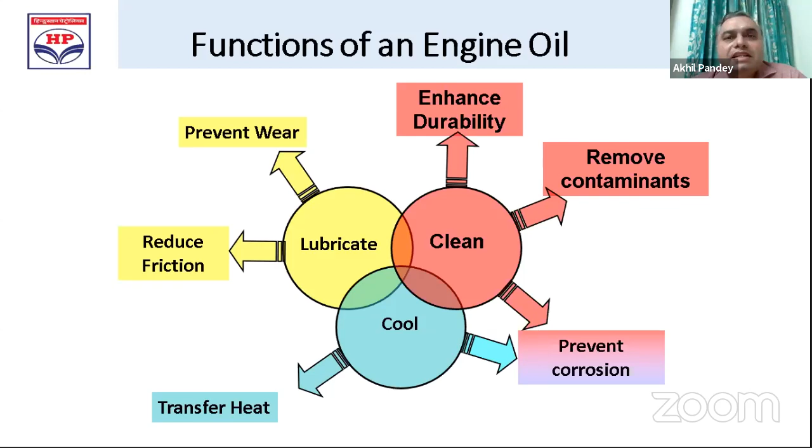If we talk about the functions of engine oil, the most important functions are that they help in lubricating, then cooling and cleaning of the various components. The lubricants help in preventing wear and tear of the components and also help in reduction of friction. They transfer heat from the components and thus help in the cooling of the engine. They clean the engine by removal of contaminants, thus enhancing the durability of the product. They also prevent corrosion of the components from the acids formed during the combustion process, thus extending the life of the engine.

During your interactions with various oil marketing companies, you would have heard about multi-grade oils like 20W40 or 10W30. So exactly what are these multi-grade oils and what do these numbers actually stand for? These numbers basically indicate the SAE viscosity grade, which gives an indication of the viscosity of the product. So if there is a number like 5W, 10W, 20W, or say 30, 40, or 50 mentioned on the package, it basically indicates that the oil is a monograde oil. Whereas if there's a number written like 5W30, 10W40, 15W40, or 20W40, then that means it is a multi-grade. This W basically indicates the winter grade, for winter application. So in a 10W30 grade, for example, this 10W indicates the viscosity grade under low temperature conditions. The lower the number, the better the cold startability of the product. Similarly, 30 indicates the viscosity grade under high temperature conditions. The larger the number, the higher the viscosity.

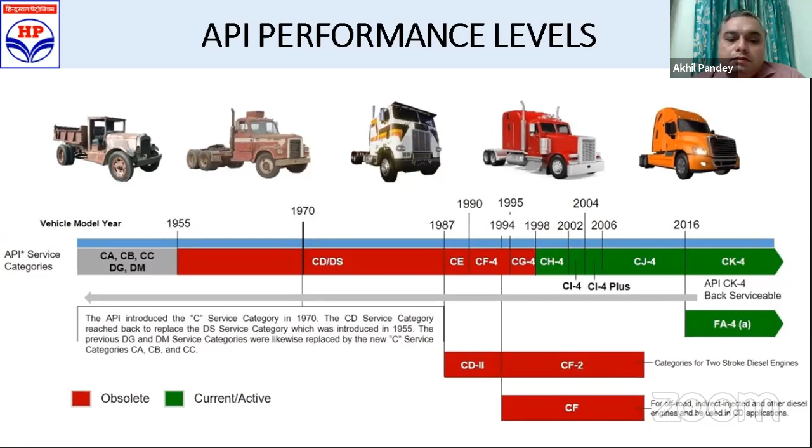HPCL premium diesel engine oils are known by the name Milcy. For different performance levels, we have brand extensions like Milcy Turbo, Turbo Star, Turbotech, etc., which I'll be talking about in the future slides.

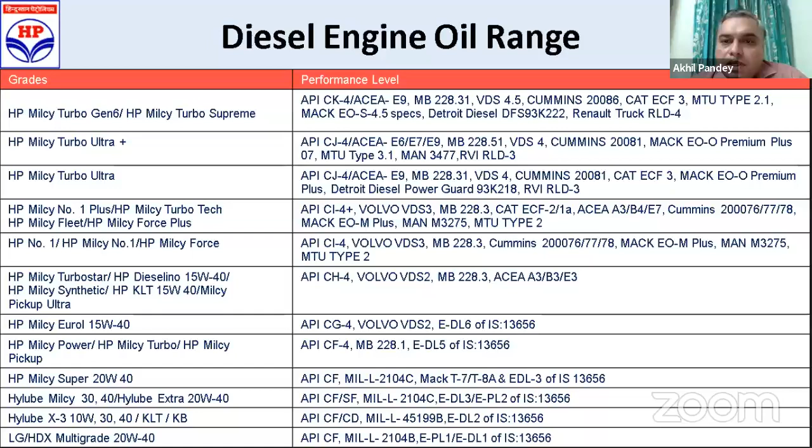This is the entire HPCL diesel engine oil range. You can see that from the API CF level, we have products up to API CK4 level, which is the latest range. So we have an entire range of diesel engine oils for the market, and we have also recently launched the BS6 range.

I'll cover a few of the various diesel engine oils which we are selling in the market. First, we have HP Milcy Turbo 15W40. This is an API CF4 oil, also having the Mercedes-Benz 228.1 specification. It is used for naturally aspirated and turbocharged engines, and is one of the highest selling grades of HPCL.

Then this is HP Milcy Turbostar 15W40. Again, this is a premium diesel engine oil, and it exceeds the API CH4 performance level. It is recommended for all new generation diesel engines, commercial and light commercial vehicles manufactured by various OEMs.

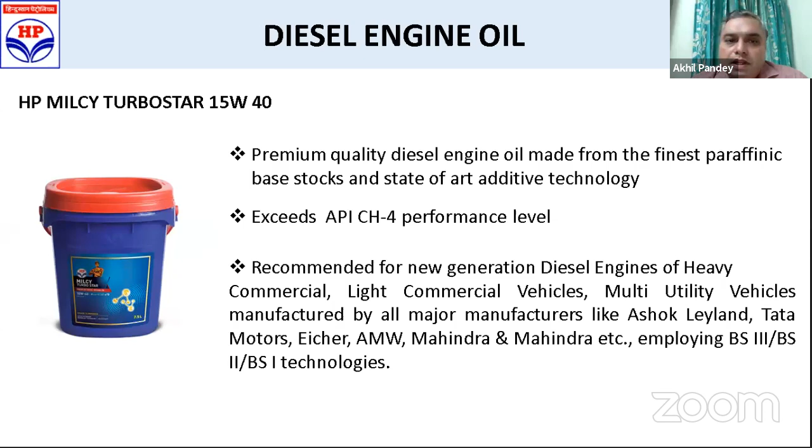This is HP Milcy Turbo Tech. This is a super premium diesel engine oil which exceeds the specifications of API CI4 Plus, and it is available in 15W40 viscometrics. It is recommended for up to BS4 diesel engines for commercial, light commercial, and multi-utility vehicles.

As you are aware, pollution is a big problem in India, and in order to curb this pollution, our government decided to regulate the emission of air pollutants from motor vehicles. Thus, to reduce emissions from motor vehicles, BS6 norms were introduced all over India from April 2020. With the introduction of these norms, there would also be a change in the requirement of lubricants because of the various after-treatment devices being used in these vehicles. In line with these changes, HPCL has introduced their entire BS6 range.

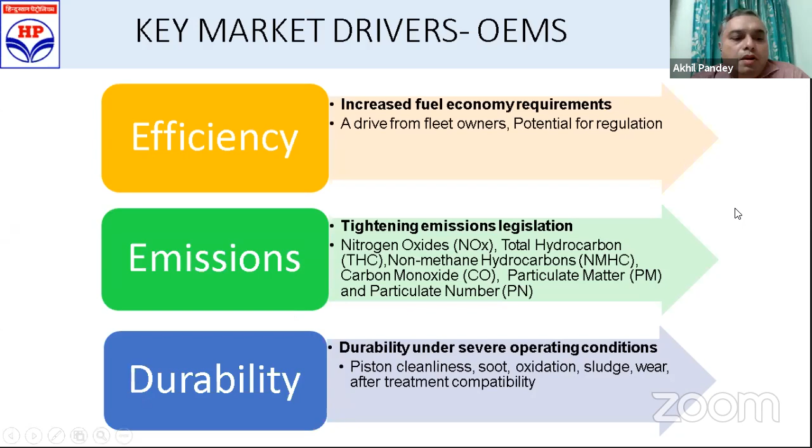If we talk about the key market drivers which are driving the OEMs, there are three major drivers: efficiency, emissions, and durability. Efficiency has come up from increased fuel economy requirements, from government regulations and customer requirements. The tightening of emission legislations has resulted in a reduction of pollutants like NOx, carbon monoxide, particulate matter, etc. Since engine operating conditions have become severe over time, durability has also become of prime importance, and hence piston cleanliness, soot oxidation, sludge, wear, and after-treatment compatibility play a key role in enhancing the life of the engine.

With these changes, there has been an impact on lubricants also. For increasing fuel efficiency, lower friction is required, so oils have to shift to lower viscometrics, like 10W30. For controlling emissions, exhaust after-treatment devices are being installed in vehicles. These devices have catalysts which are poisoned by sulfur, phosphorus, and sulfated ash. So you require products with low SAPS, that is sulfated ash, phosphorus, and sulfur. And for better durability, better anti-wear properties are required in the engine.

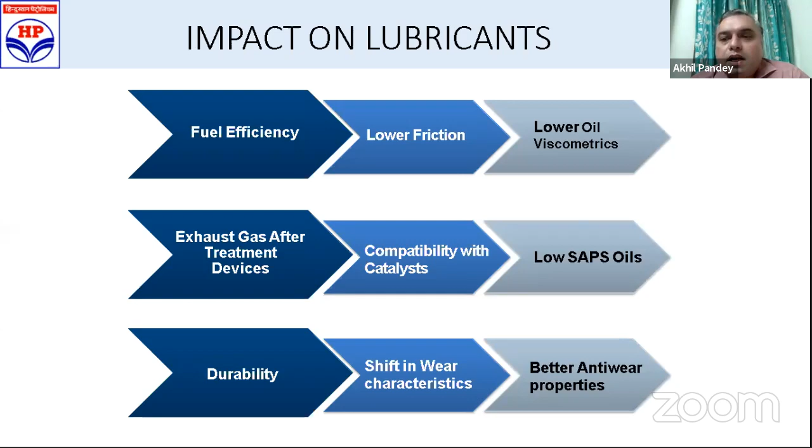We have an entire range of Racer products in various viscometrics, meeting performance levels from API SJ to API SN, and also JASO-MA. In case of four-stroke scooters, we have the product Racer Scootex, available in 10W30 and 10W40 viscometrics, with a performance level of API SL and JASO-MB.

In passenger cars, we have recently launched a new series, HP Neosynth Gen 6, which is available in 5W30 and 0W20 viscometrics. This product is available in API SN Plus and meets the performance level of ACEA C2.